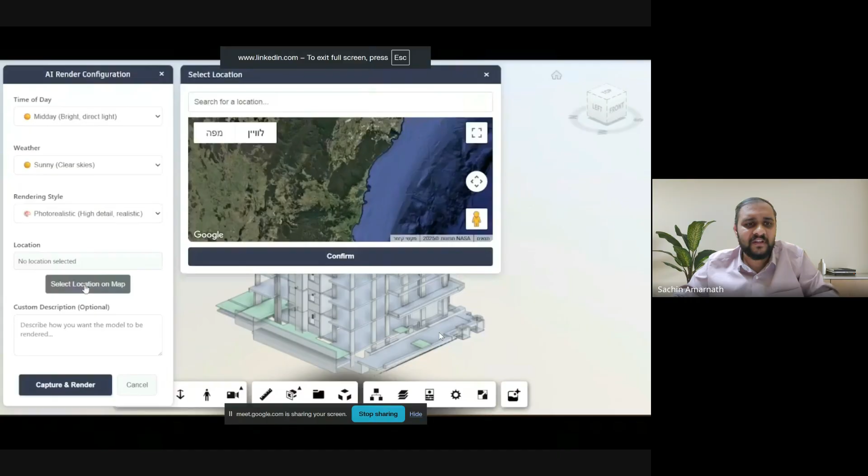So generative design is a great use case, a great example of artificial intelligence. At this stage, let me quickly give you one example of how generative design is actually transforming the construction industry. Let me go ahead and show a post that I've saved. Now you can see what's happening here. Of course, this is not Indian data, but I want you to carefully notice what's happening.

They're able to use this tool using Google Maps. They're able to train the AI model and pinpoint a location. And they're saying, this is my plan, can you create a render of how my project might look in the same location? Earlier, architects used to basically create renders and put in some mountains and hilly areas. But now it's possible to literally go to the map, place the exact same location, and watch the same street that you're living in, and see how it looks in the real world.

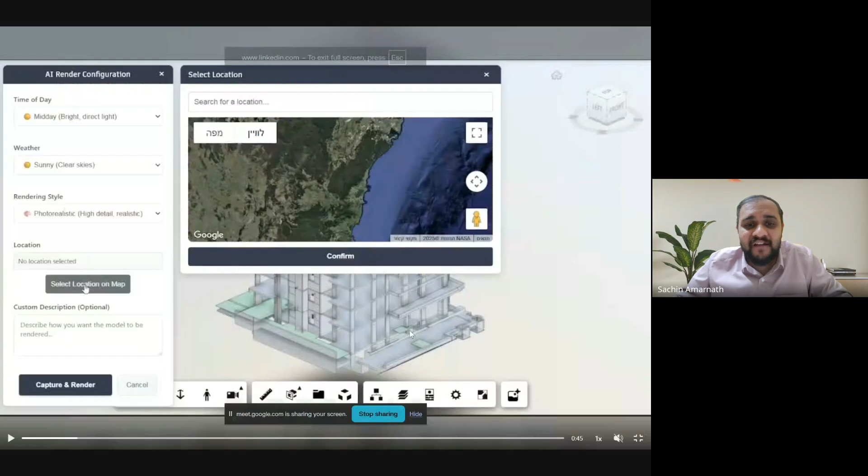This is a great little example of how far we have come in terms of generative design. I'll play this again so that those who have missed it can see this.

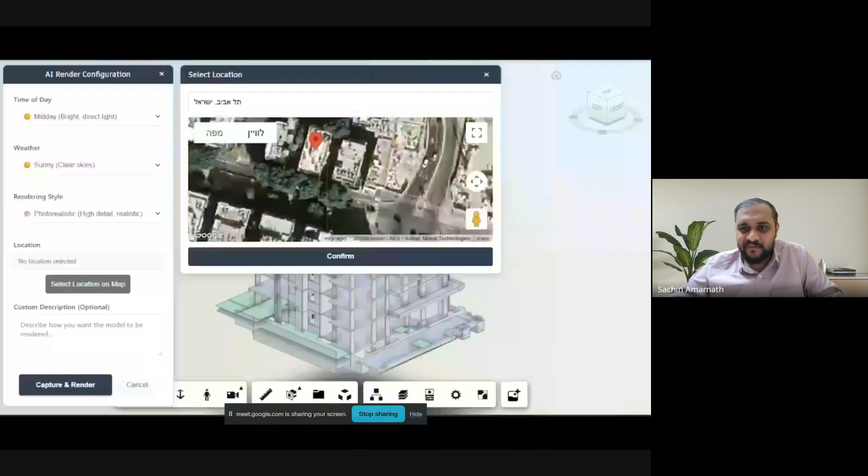So this tool will basically analyze what kind of properties are there and the neighbors, and it will generate the same plan and place it into that particular project. How amazing is this? So this is a small example of generative AI in construction. Now I'll give you another very interesting example.

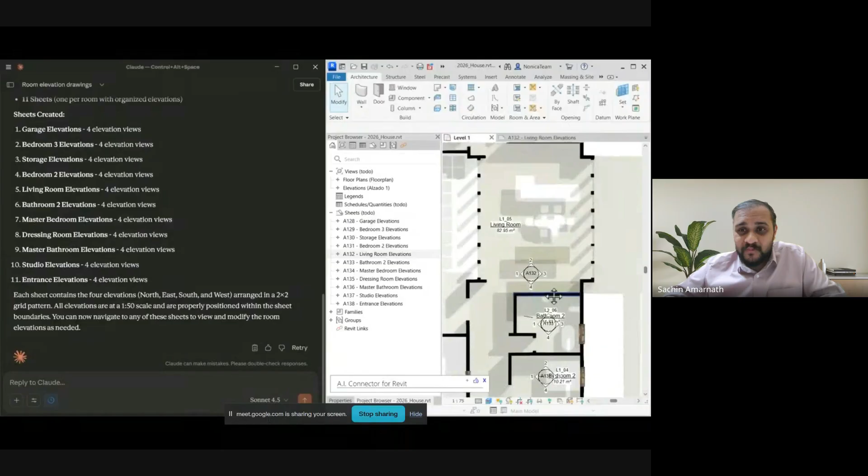This is a great example of generative design, where a popular tool called Claude is integrated into Revit. On the right side you see the Revit file, and just by prompting, saying 'can you please create elevation views,' the user is able to create options for elevation. You can see these are the views.

Now the user is saying, change the visual style and make it realistic. So based on that, you can see the colors are now very realistic.

All this used to take a lot of time. For you to convert a 3D into an elevation, it would easily take 4 to 5 hours before, just talking about 5-6 years ago, before generative design came into picture. But now it's very advanced. It can do this in less than 30 seconds.

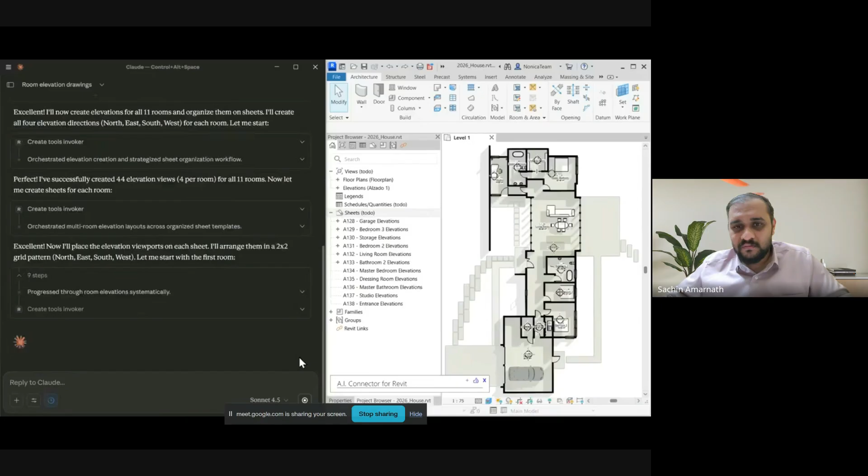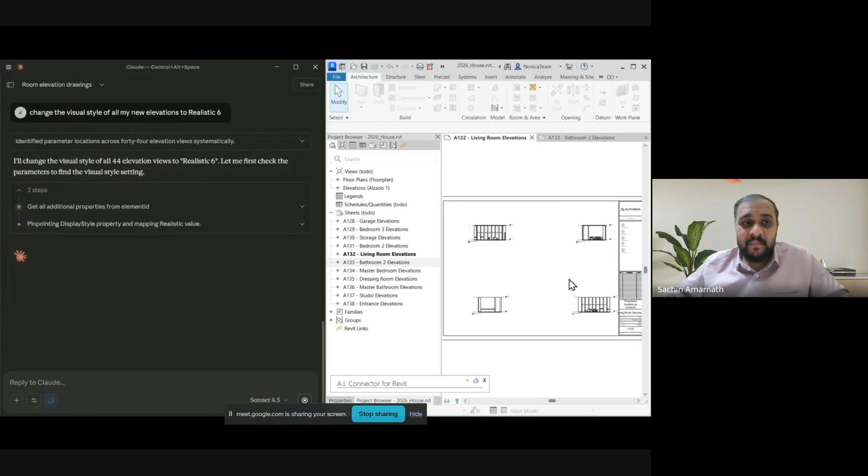'Create elevations for all rooms in my view and add to a sheet' was basically the prompt, and you can see the elevations are created automatically. This eliminates a lot of manual work where designers were needed, their time was committed, which would reduce the profitability of any project. But now the same designer can generate all of this in less than 2 minutes. This is just one small example of how generative design is impacting the construction industry.

This is also another example of generative design. Now this prompt is slightly more complex, where the user wants to do a bunch of things. This is called running AI agents, where multiple functions, multiple outputs are expected. In the last two examples there was only one output, one task to perform. Here you see there are 6 tasks that the AI tool is expected to perform.

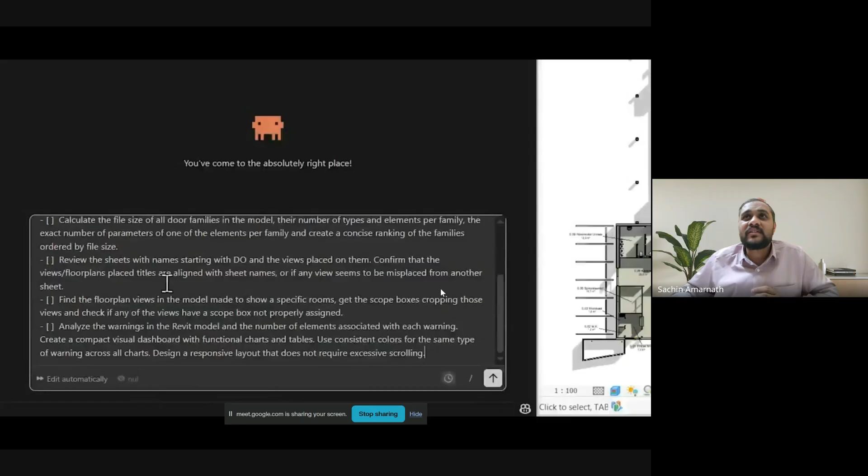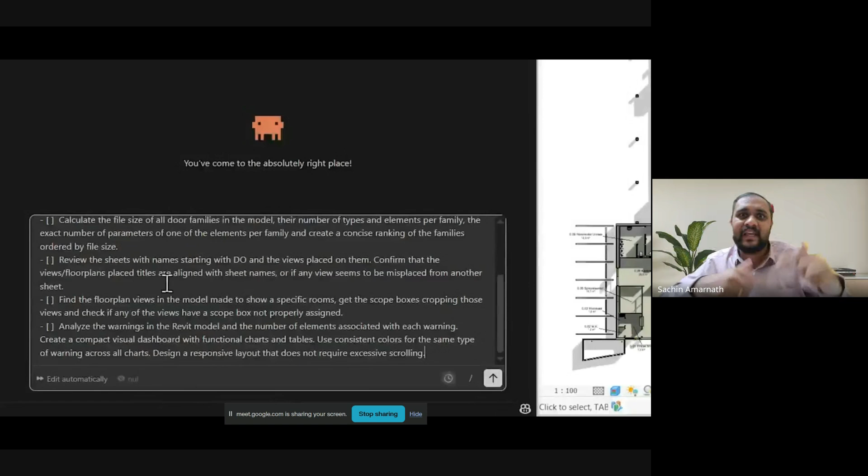Some of these tasks are such that by performing step 1, only then can you perform step 2 or step 3. These are called agentic AI, or agents, where one part of the AI performs one task, then the second part uses the output of the first part and processes that data for something else, so a bunch of tasks are happening at the same time. This is called agentic AI, and this is a great example.

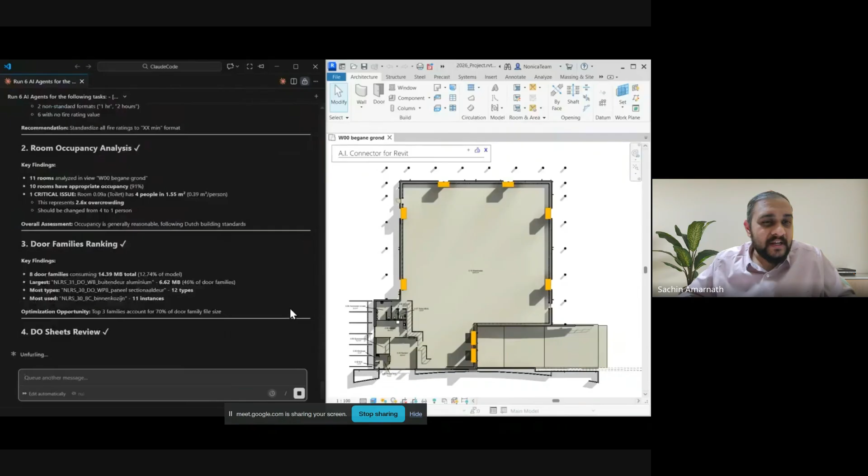Again, the AI tool Claude is being used, integrated with Revit. On the right hand side you see the entire plan of this property, and it is doing ranking and analysis, a bunch of things, and it's also showing what needs to be fixed in your project.

If there are mistakes in the project, these AI agents will find the mistake, compare it with certain data, and give you output as to what these mistakes are and how to fix them. Now let me quickly show you 2 or 3 other examples of how other forms of AI are taking over.

Just before that, let me quickly run through these slides because they're very important, at least for your understanding. So we saw a great example of generative design.

Now let me show you how scheduling and forecasting can be done using AI, and how computer vision was also a great application that most companies are already adopting. Global leaders, especially in Europe, are adopting computer vision for progress monitoring, quality defects, safety related issues, and sometimes procurement too. Let me show you a couple of examples.

Just before that, this slide is very important: how every stakeholder - owners, developers, PMC, project management consultants, EPC contractor or general contractor, subcontractor, designers, suppliers - every single type of company is able to leverage AI for higher productivity. That's the very important outcome.

For example, Microsoft and an organization called BuiltWords recently published a report in 2025 on the use of AI tools for different stakeholders. For example, PMC can leverage predictive modeling and predictive analysis, which can help detect schedule delays or cost overruns, help in flagging early warnings, or help in faster decision making. So for every different kind of company, there is a different outcome of artificial intelligence.

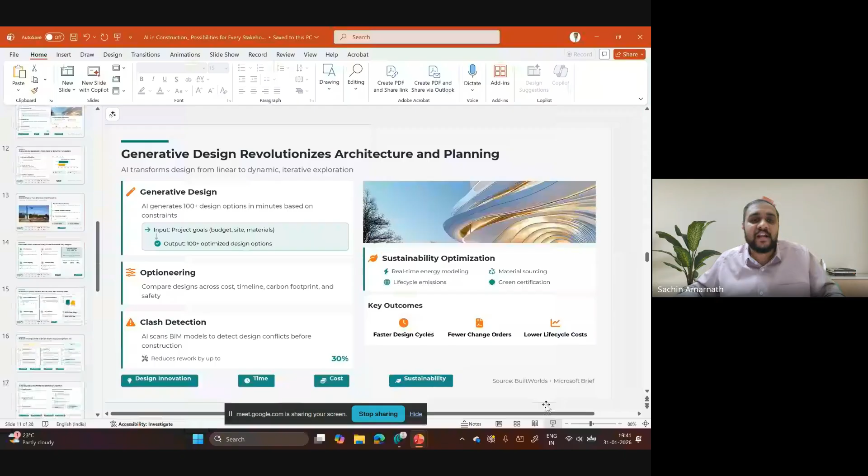Let me quickly show you a great AI tool in the construction industry called Alice Technologies. It's a US based company - in India they haven't started their presence yet because they're majorly targeting US and Europe now. But this is a great example of how planning and scheduling can be done using AI.

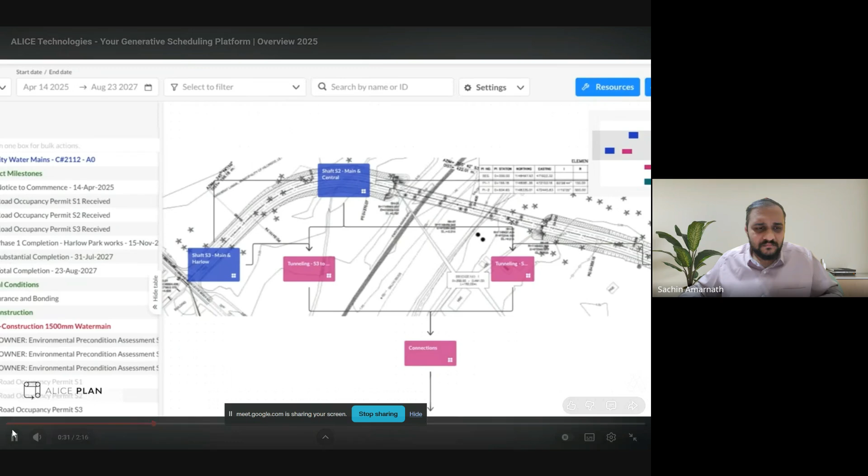Now you can see what just happened - they dropped the 2D image and the Primavera schedule.

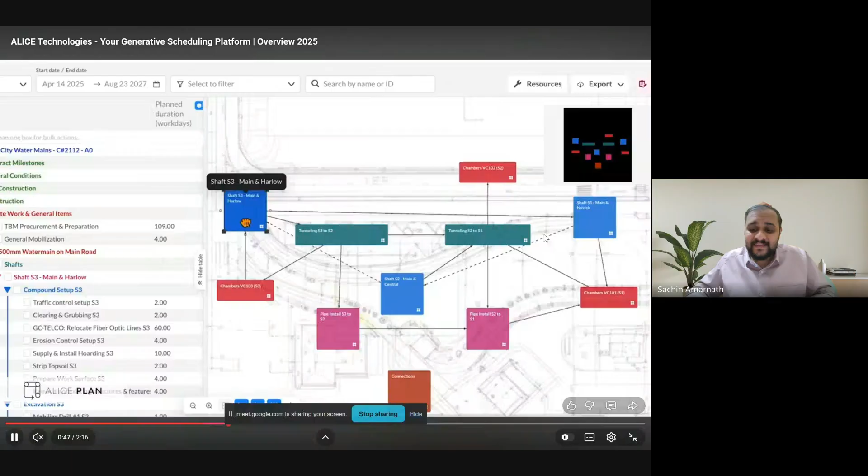You could see that they were able to visualize different steps of a work breakdown structure. Now this is called Alice plan. Let me pause and explain a little bit.

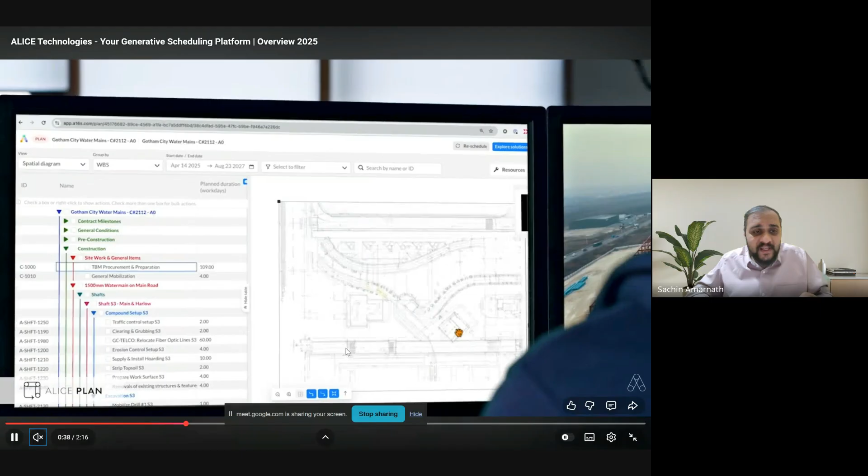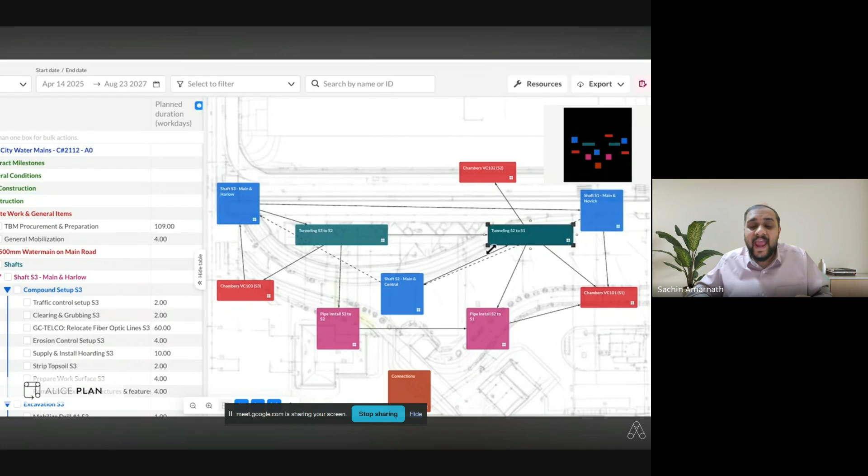After that, it automatically reads and visualizes the schedule, showing it by work breakdown structure. There are multiple steps in a work breakdown structure, so you can pick and choose which part of it, and overlay these activities on each other so the visualization is easier.

Then the next step of the same project is you can also optimize. The schedule is planned with certain resource constraints. Now the user is saying, what if we add another concrete pump?

Instead of using one concrete pump, I'm using two concrete pumps. If I use two concrete pumps, how many days can I actually reduce the schedule by? By how many days can I fast track the entire project?

Right after this is done, you can see the user just used two pieces of equipment instead of one, and it was able to create 7 different options.

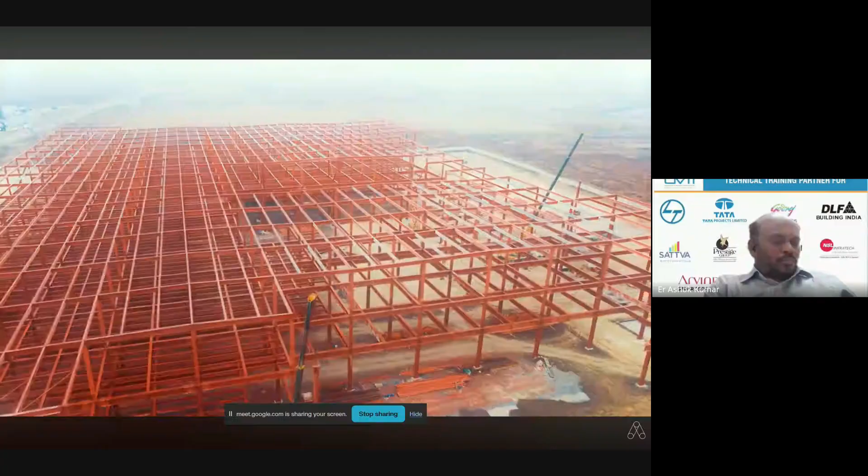So that is one great example of how AI tools are being used.

Sachin, I will take a minute once you are available. Yes, please carry on, please carry on.

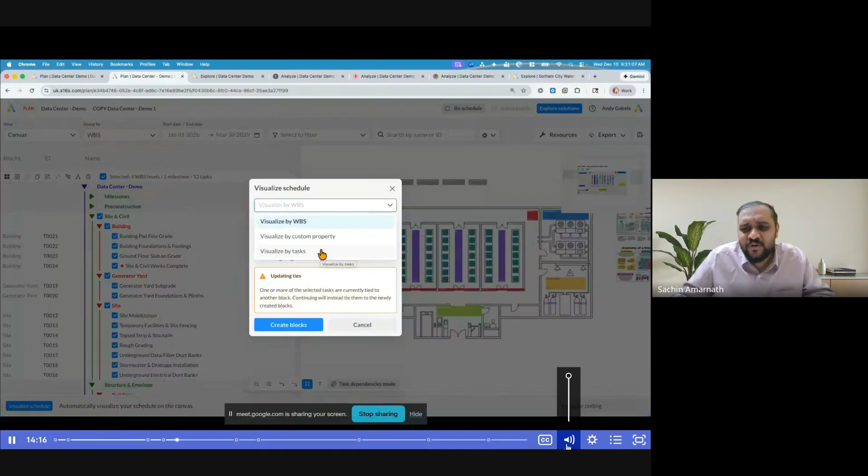Let me show you one case study of how this tool called Alice Technologies is able to chart out multiple scenarios. For those who don't know the extent of AI tools being used currently in the industry, some of these companies are able to create scenarios. For example, on the left hand side, if you see...

Initial energization 2 weeks earlier. So there is a scenario in this particular project where one activity is being done 2 weeks earlier. If this happens, the overall project duration is 506 to 509 calendar days, and the overall budget is $7.8 million.

Now the second one is building watertight 2 weeks earlier. If you build this particular facility, what will be the impact on schedule? If you take this option, which is green color, the overall duration reduces to 509 calendar days. But if you take another option in the same project, the overall schedule will be 523 days and the overall cost will be $8 million.

So why am I explaining all this? These are all examples of different kinds of what-if scenarios. By building these scenarios, you will be able to test what is the optimum time and what is the optimum cost. At a certain stage, if you have time constraints or money constraints in your project, it's very difficult for companies to plan for multiple scenarios. So this particular tool will help you in planning for those scenarios.

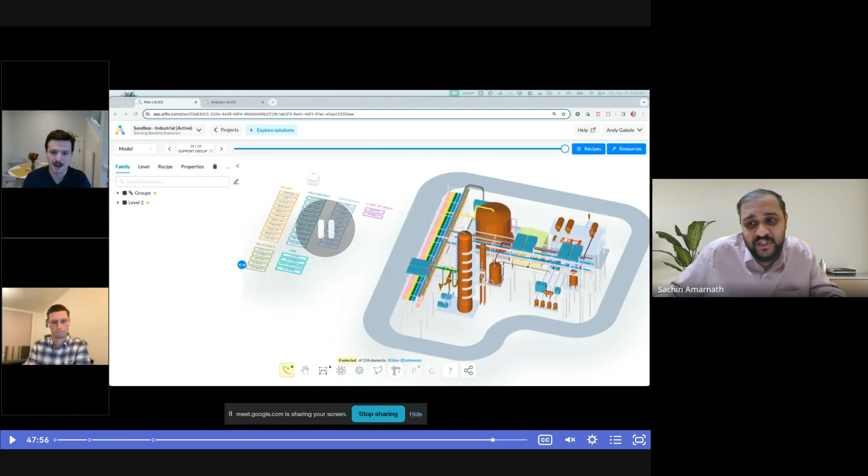They're also creating different kinds of parallel activities, which is sometimes called overlapping in a construction project. By doing this kind of overlapping, and by studying the actual utilization of the crew through creating resource histograms, they are able to finish the project much quicker. This is just a very small example of how AI is being used.

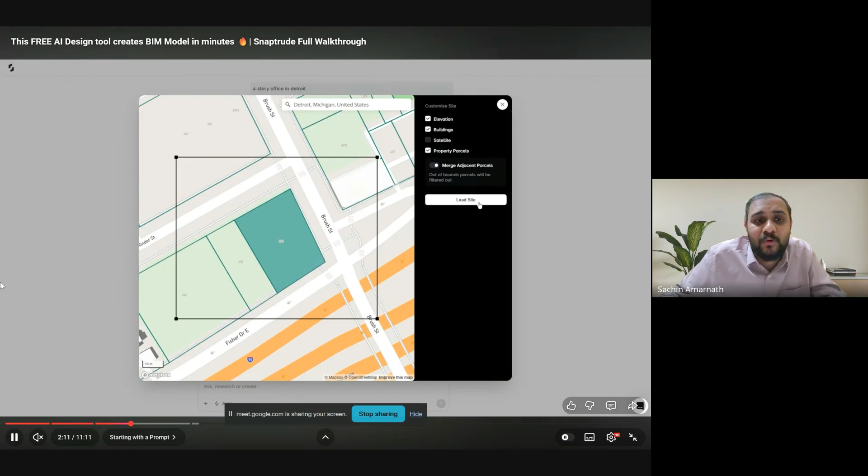Now let me quickly show you one more example. I know Ashok sir told me 45 minutes, I'll just take 3 more minutes so you get an understanding of how, especially in the design stage, this tool called Snaptrude works. Snaptrude is a competitor to Revit, Nemetschek, and other global companies.

So this is a smart little tool powered by the capability of AI. You can see it has a 2D model which is converted into 3D, and each of these blocks used to create the 3D model comes with its own data.

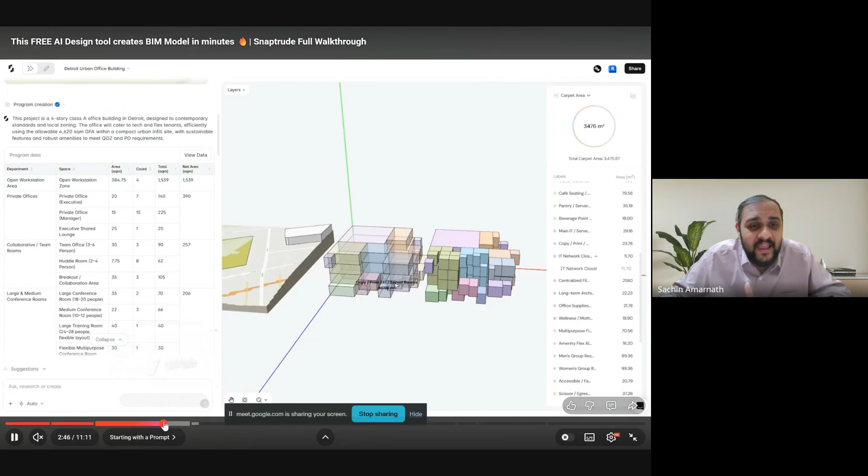It's saying this is a project of a 4-story Class A office building in Detroit, designed for whatever standards, and you see the different departments, the area in terms of square meters, and the net area.

All you have to do in scenarios like this is prompt well. Now this is of course a YouTube video, but the intent of explaining this is to show how these tools are able to take decisions automatically.

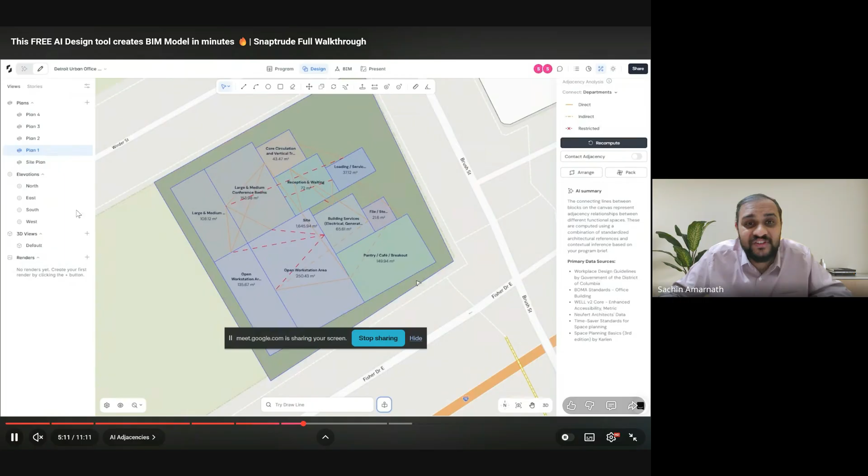So it is assigning different stories, and it is coming up with different plans of the same layout. So same plan but different layouts.

It's showing what decisions are possible in this particular project, and for each plan you'll then be able to create its own elevation and do comparative analysis.

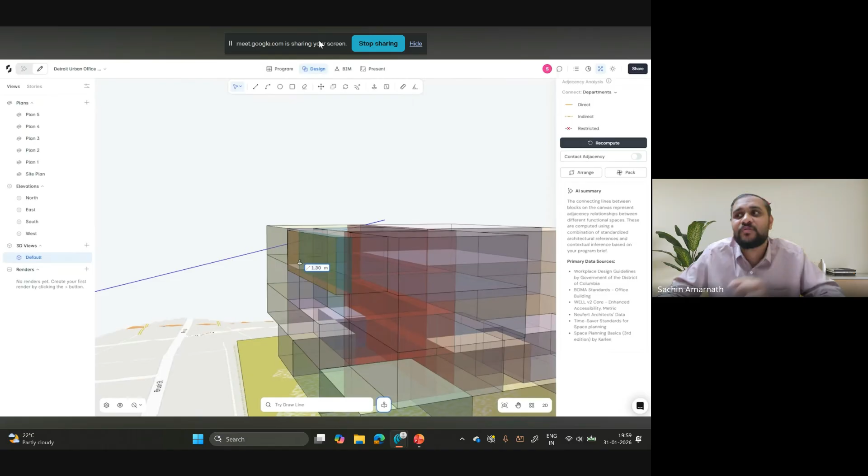Before, this was very difficult because you needed 3 to 4 different people rendering the project, 3 to 4 different designers working on the 3D model. But now, creating these different layouts and finding the most optimized layout has become 10 times easier.

And then you'll be able to add different colors. You can even do analysis of how much heat is there on the project. You can do different kinds of simulations by just typing.

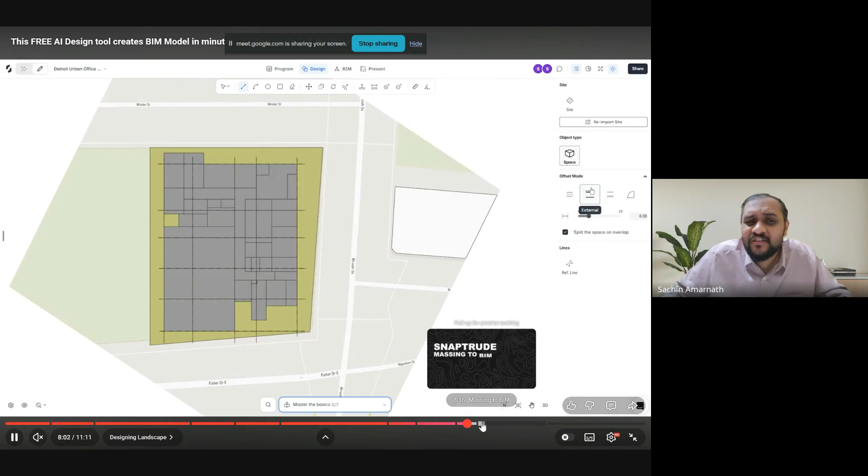So in the design stage, obviously a lot of progress has happened, and also in the stage of progress monitoring or computer vision, there are a lot of updates that have happened.

What they did was AI-driven risk analysis. They predicted the different kinds of risks, and used something called the 90-10 rule, where they focused on the most important 10% of the risks and eliminated 90% of the least important ones.

By focusing on the 10% most important, most critical risks, they were able to do 30 plus risk assessments, then identified the top 5% of activities, and took action to plan for that risk or try to avoid it.

Once they did this, they were able to avoid 150 days of delay in the construction process. These were risks related to procurement, sequencing, and quality issues. Just by planning and scheduling better, they avoided 150 days of delay, which is a big number, and a lot of savings in indirect costs.